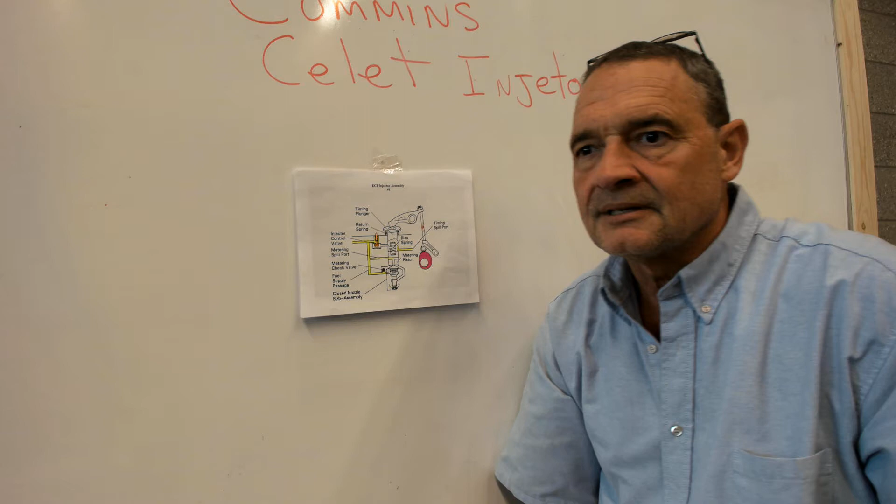Okay, Owen, do we got numbers? We do. Okay, you ready? I'm ready. Okay.

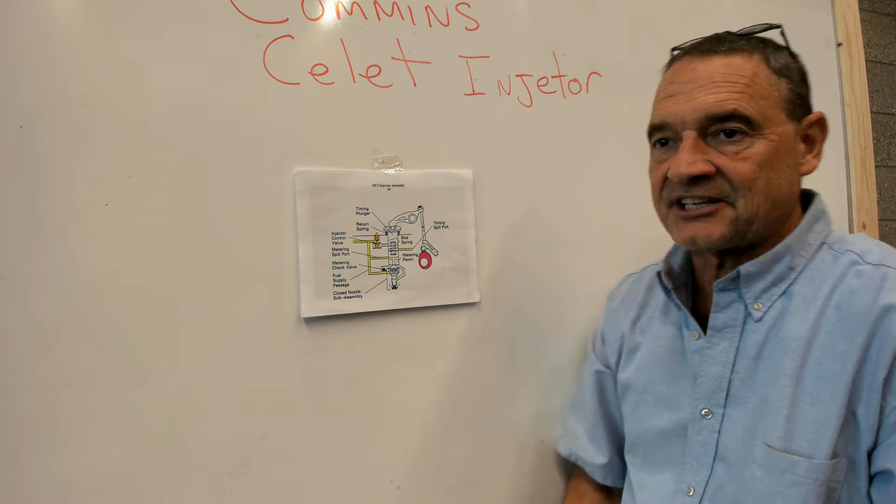Hi, Craig here. Today I want to talk about the Cummins Celect Injector. This is an electronically controlled injector. I've got my flip chart here, and I'm going to bring the camera really close so we can take a good look at what's going on in this injector as it goes through the process.

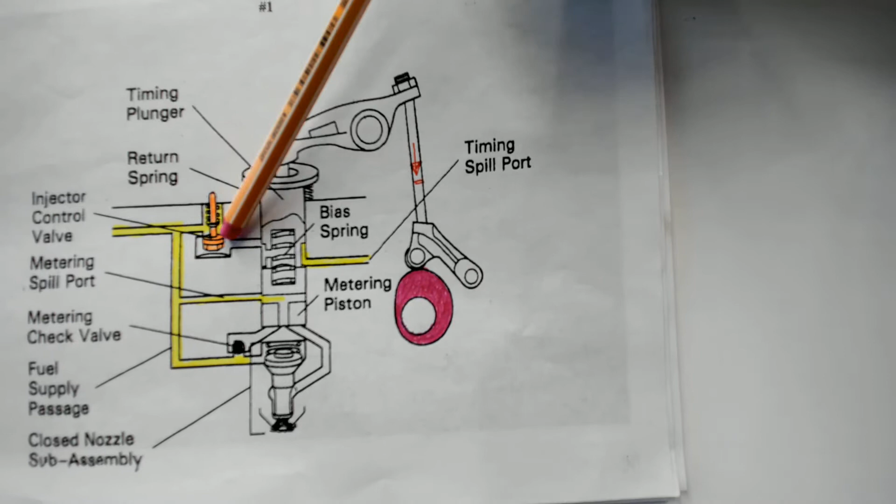I'm going to talk about some of the main parts of the injector to start with. Right here, the injector control valve - this is very, very important. Right now it's closed, and we're going to look at the cam position. I've colored the cam with the same color pen to show that it's on the outer base circle right now, and the timing plunger and metering piston is all the way down. Everything's compressed in there. The valve is closed.

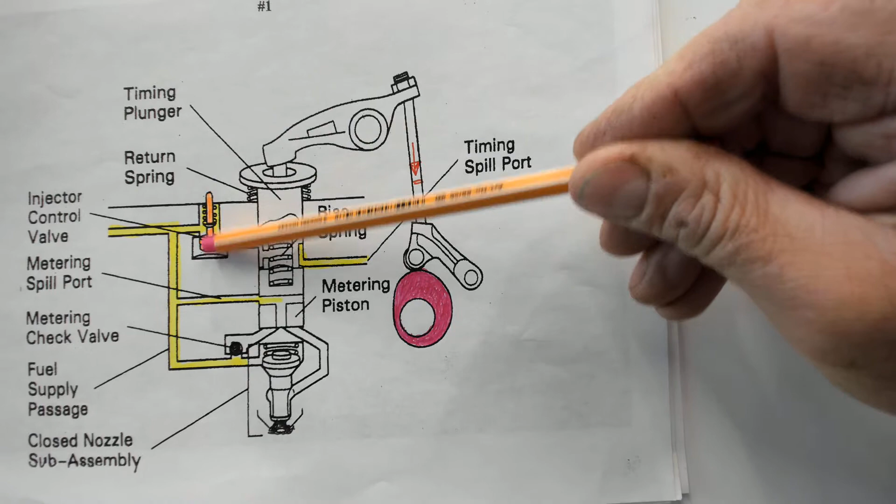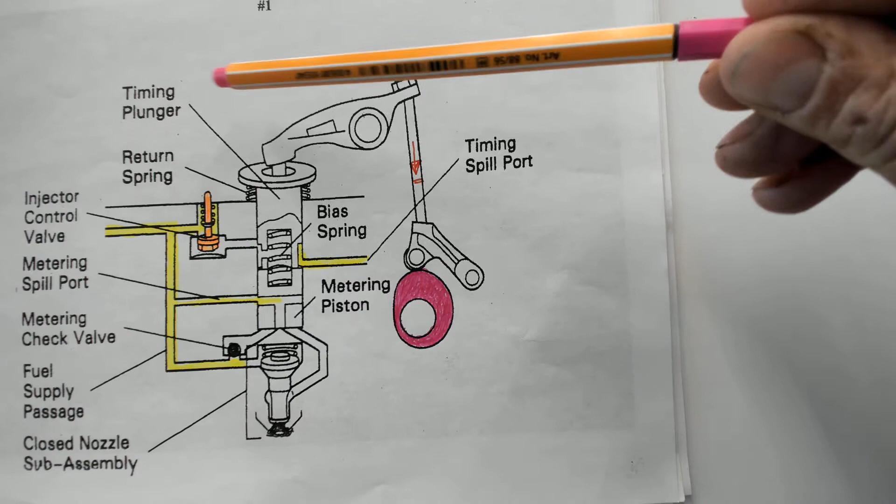When the solenoid activates, it closes the valve, and its spring opens the valve. We've got a little metering check valve, or ball, with a little bias spring not shown. We've got a couple of spillways - our metering spill port here, our timing spill port here, and then our fuel supply. This is the fuel that is supplied at 150 PSI, which is the operating pressure for this system.

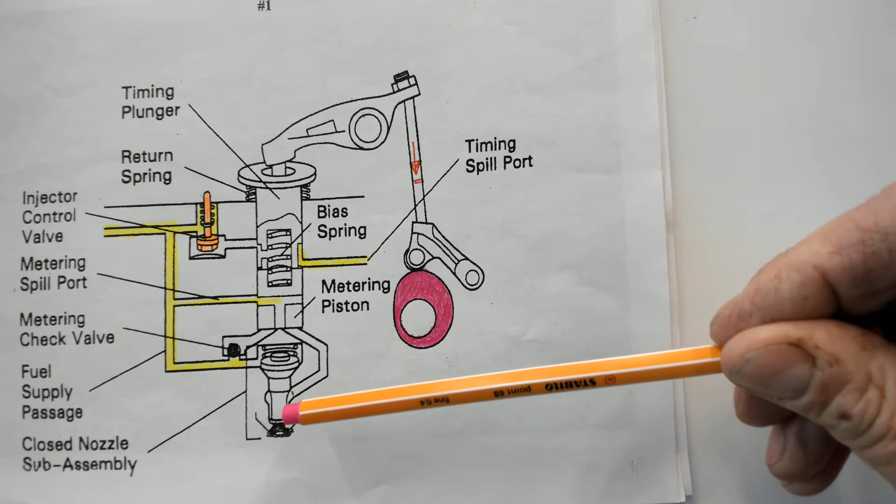And we can go through the whole process of how this works. So there's our nozzle assembly, and down here, this is where the fuel is going to be metered to when we get there. We'll start this process with all the components compressed, the needle valve pushed down, and we've just finished the last cycle, and we're going to move on into the metering cycle.

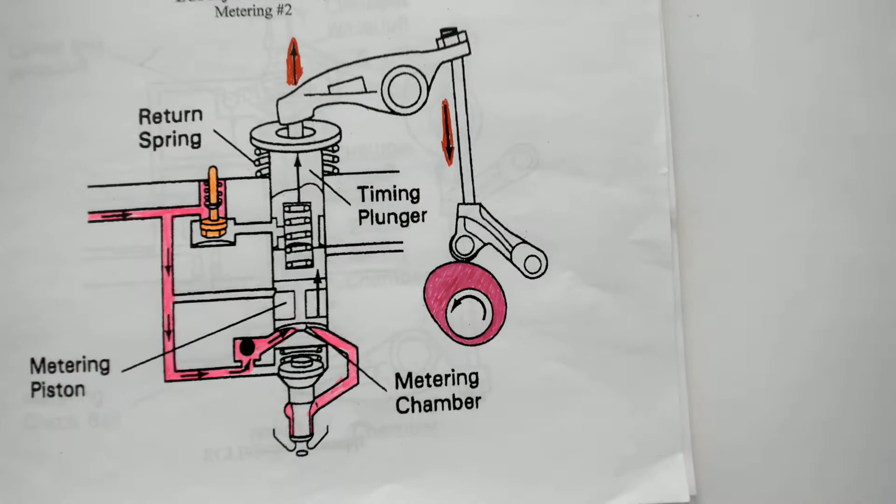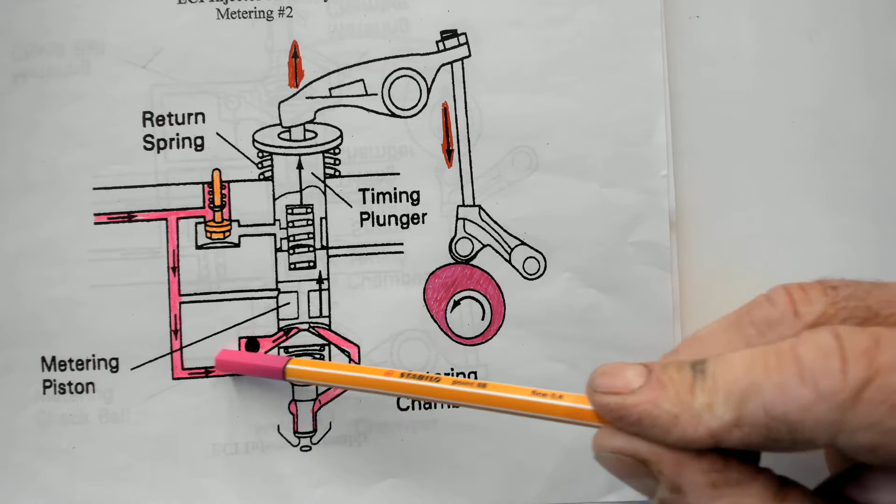So the metering cycle - we'll notice where our plunger is. We're coming on inner base circle, so that means this is coming down and this plunger is being lifted up by the return spring. At this point, the solenoid is keeping the valve closed, and fuel is coming in at 150 PSI, lifting the ball off its seat.

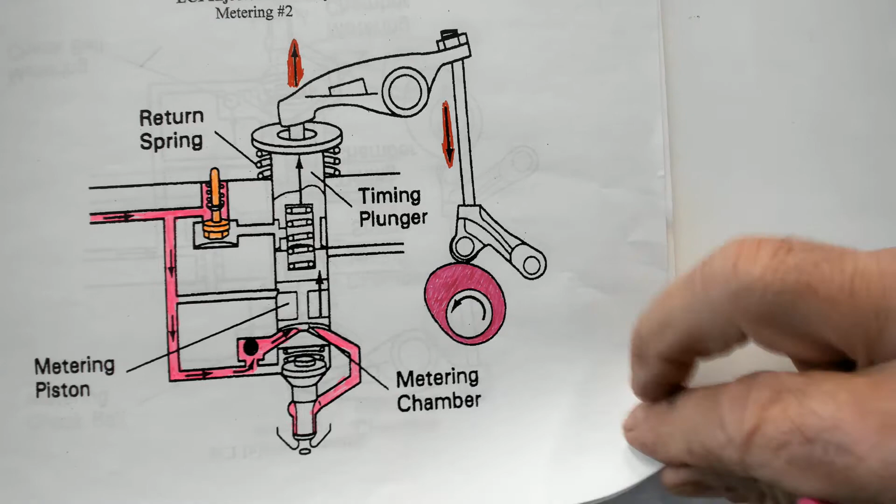Just the fuel pressure is overcoming the ball and the bias spring and filling the metering chamber. Now this fuel will continue to be metered until the solenoid excites this valve right here. And I think our next picture shows that. Okay, so the computer's decided that is enough fuel to be metered down into the metering chamber.

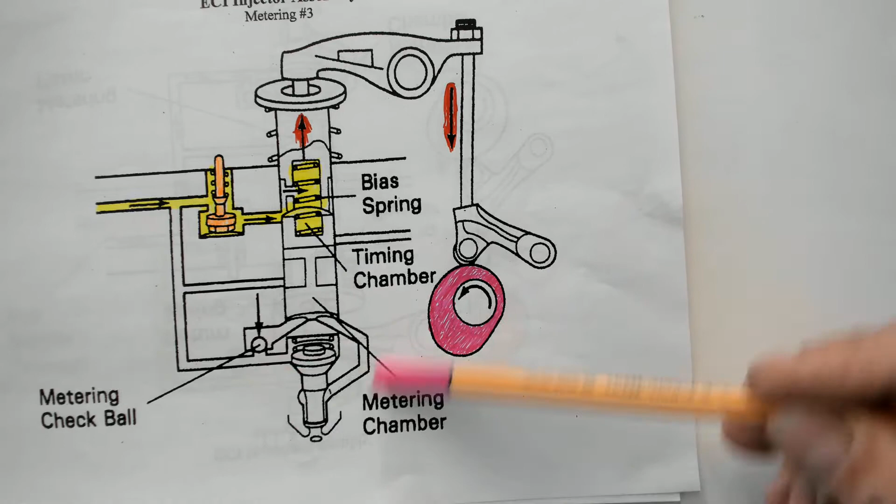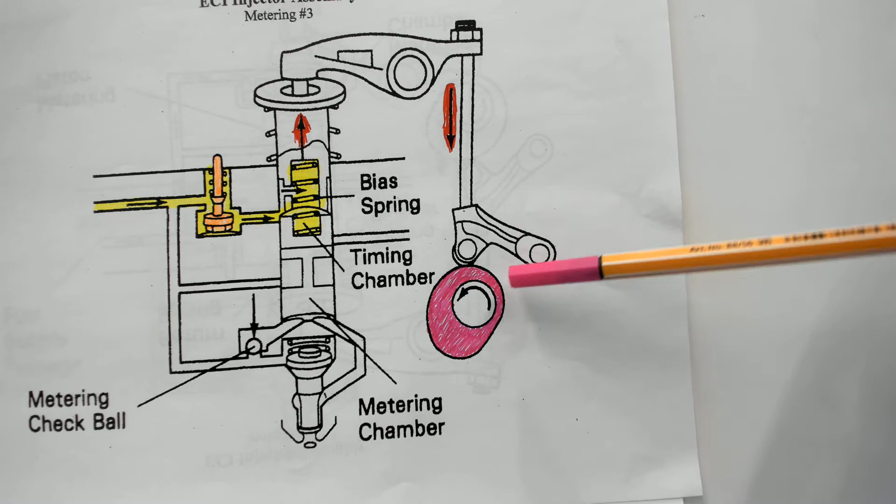So it opens the control valve by signaling the solenoid, and fuel now stops flowing down here. The metering ball closes, as I mentioned, the bias spring will cause that metering ball to close, and fuel starts coming into the timing chamber. Now we can see that we've just about come to the end of inner base circle. The piston is still coming up, and fuel continues to move into the timing chamber.

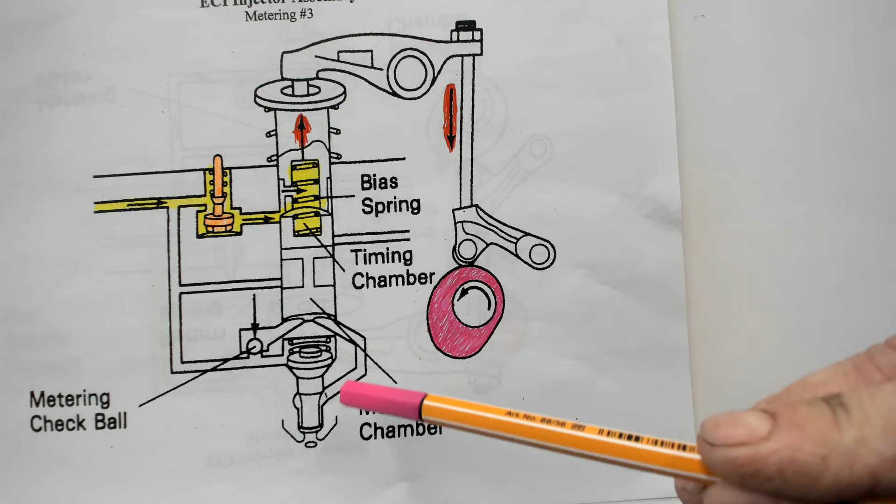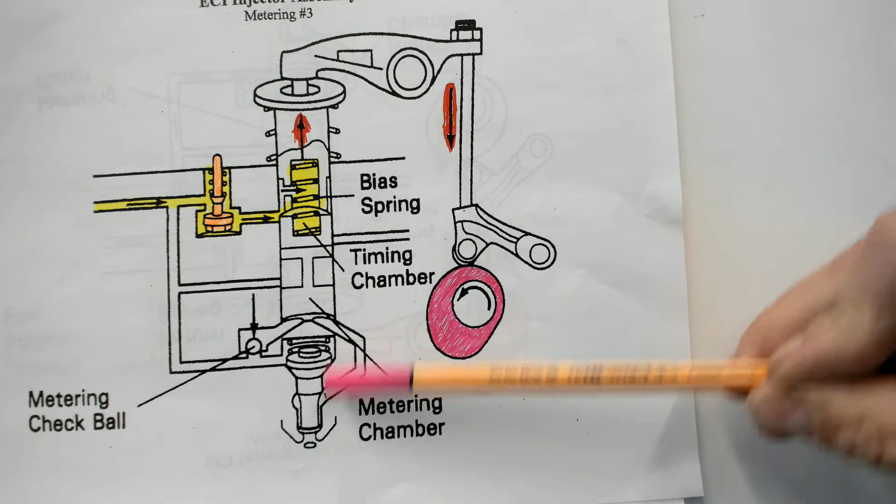What's down here in the metering chamber stays in there. And the pressure from the fuel - the 150 pounds of pressure on the fuel and the bias spring - is now pushing down, seating the ball, maintaining the metering fuel, and filling the timing chamber.

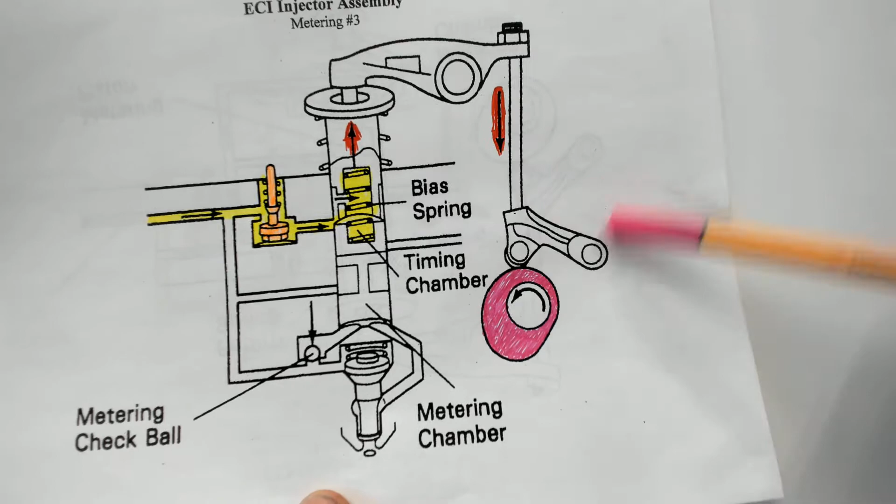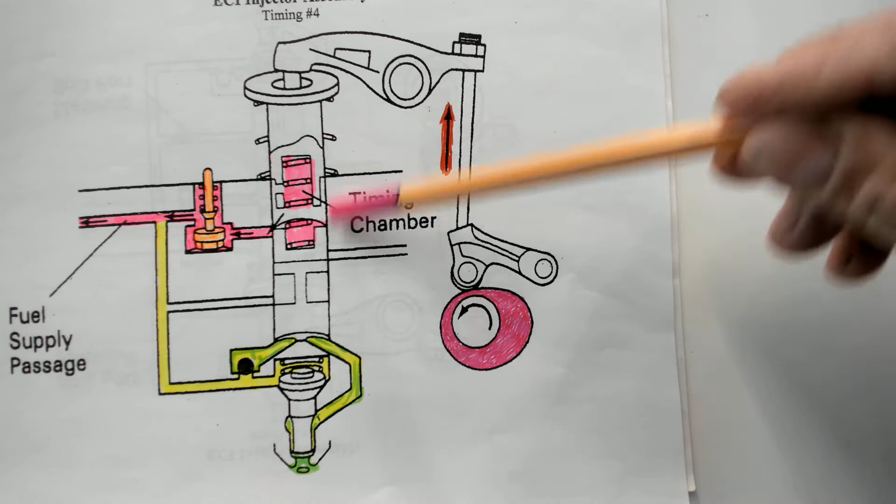So when the computer decides - let's just bring that back. Actually, this comes all the way up, fuel is filling it. And then it's going to come around and start going on - it's still coming up, and this is full. Eventually this is going to come up and start pushing down. And when that does, the fuel in the timing chamber is going to start leaving back the same way it came in. This is the computer controlling how much fuel is in the timing chamber.

Now we've already put the fuel in the metering chamber. The ball is closed, the spring is holding it down, it can't get out. There's pressure on this piston pushing down on the metering piston as well, so the fuel in there is locked in the cup.

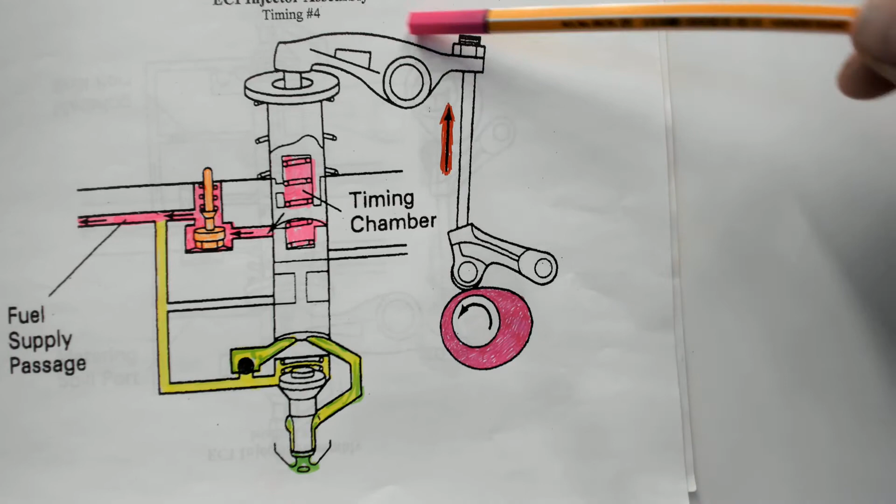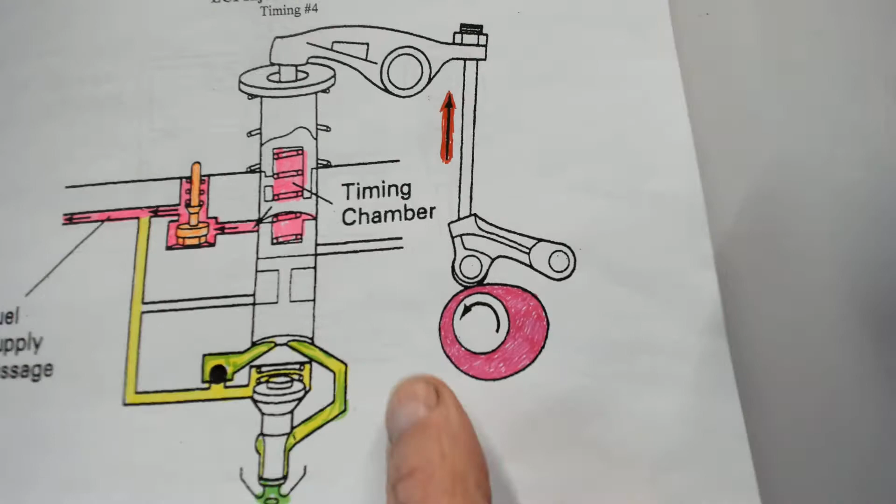Now as the timing chamber gets empty, or as fuel leaves it and back through the fuel supply port, that will continue until the computer, or the ECM, decides that's exactly the amount of fuel we want for timing and to be able to control the timing. Then it'll release this valve and the spring will close it.

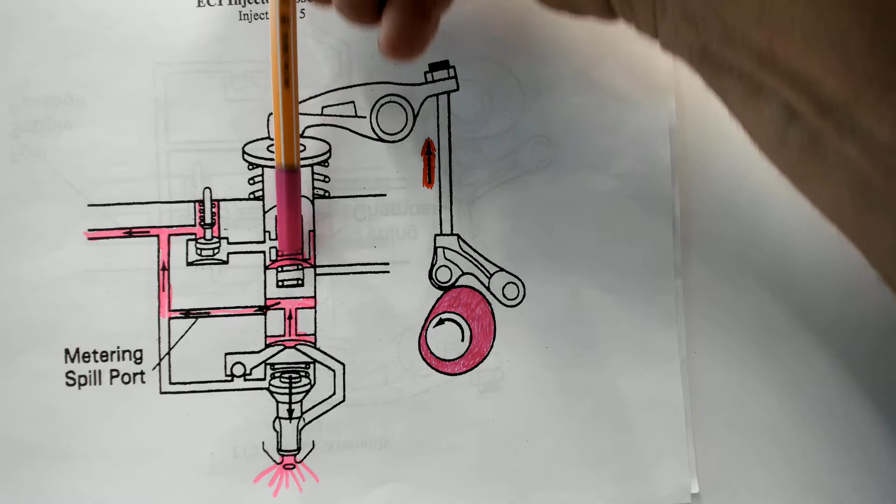And we can see it close now. And fuel - now we see we're at the high point here of the camshaft, and it's going to start pushing down. This is closed, so the fuel pressure can't leave here anymore. So now it pushes down, and once we reach 5,000 PSI, the differential pressure overcomes the needle valve, it lifts, and it starts to spray fuel.

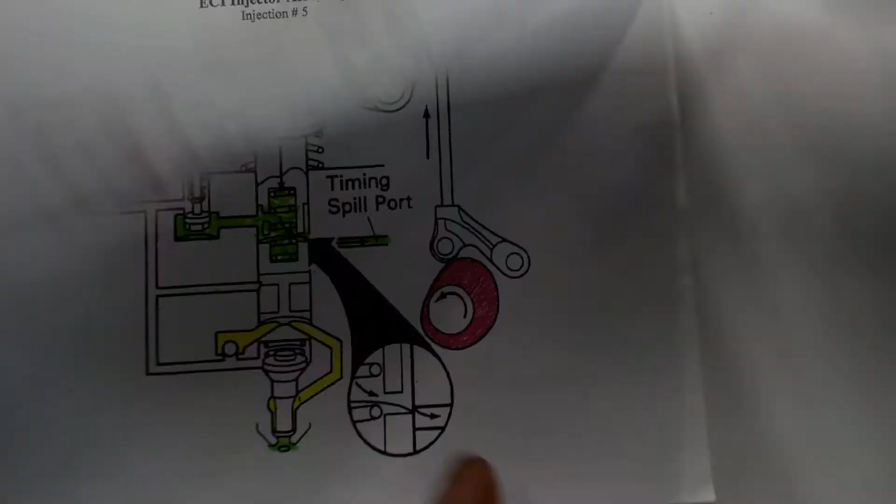This fuel in the metering chamber will continue to spray until the timing chamber comes down and lines up with the timing spill port. When it does that, pressure will be lost. This will continue downward, and all the fuel will leave through here.

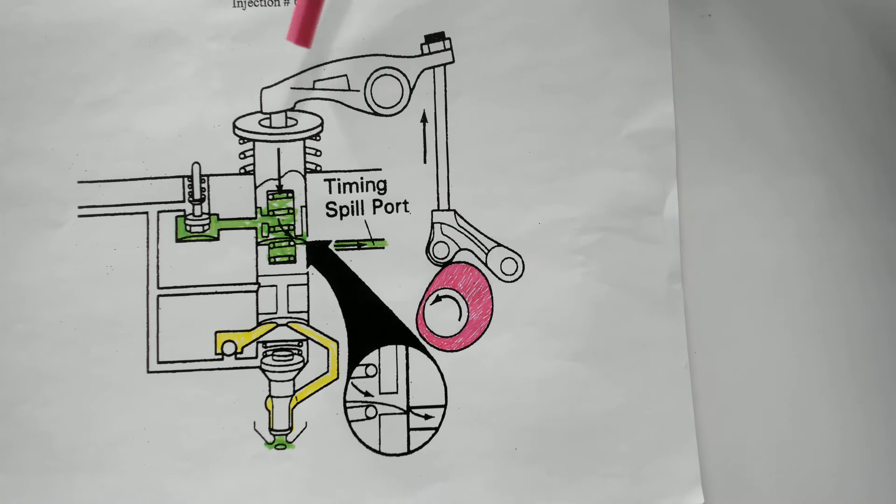Eventually the metering port will align and the excess fuel will leave out through the supply port, and everything will be down with all the force down on the cup once again. And that brings us back to the beginning, where we started with the cam on the high lobe, pushing all the components of the injector down, holding it in that position.

Hope that is clear how the Cummins CELECT injector works, and it's given you some understanding of how this works. So hopefully I can be helpful.